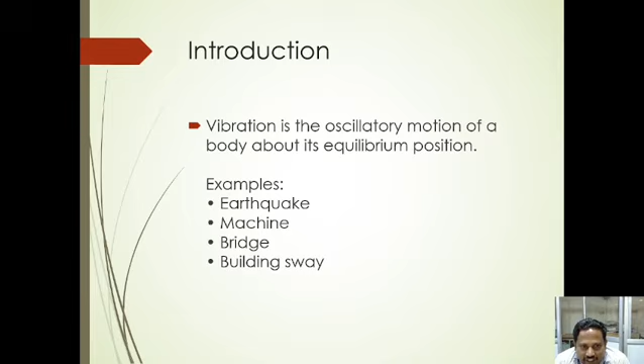Today we see the topic about vibration, the subject of occupational health and hygiene. What is vibration? Vibration is nothing but oscillation motion of a body in equilibrium position. Example: earthquake, machine and bridge and building sway. Basic terminologies: displacement, velocity, acceleration, amplitude, time period, frequency, natural frequency, damping.

What do you mean by amplitude? Maximum displacement is called amplitude. What do you mean by frequency? Number of vibrations made in a second is called frequency. What is time period? Time taken to complete the vibration is called time period.

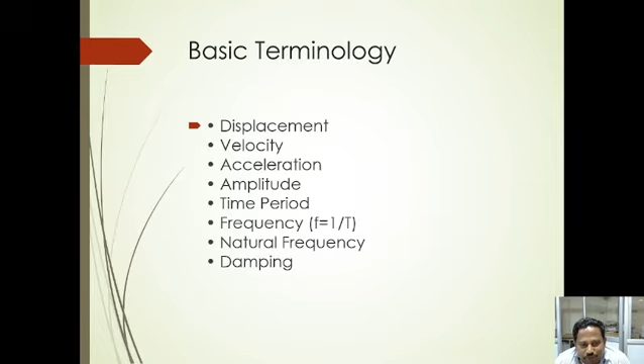What is natural frequency? Vibration made naturally is called natural frequency. What do you mean by damping? Damping is a process to avoid the frequency or protect the frequency.

What are the types of vibration? Free vibration and forced vibration. The vibration made with free energy is called free vibration. The vibration made by external energy is called forced vibration.

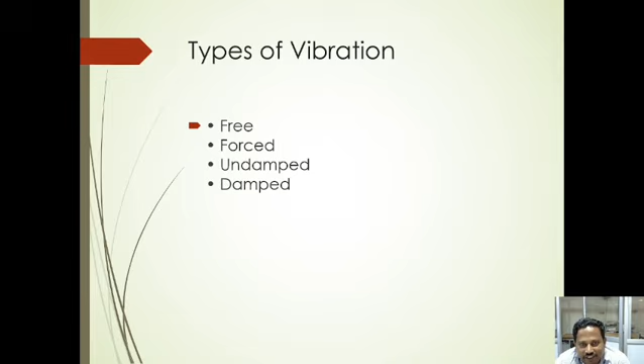What do you mean by undamped? Vibration made without energy loss. What do you mean by damped? Vibration made with energy loss.

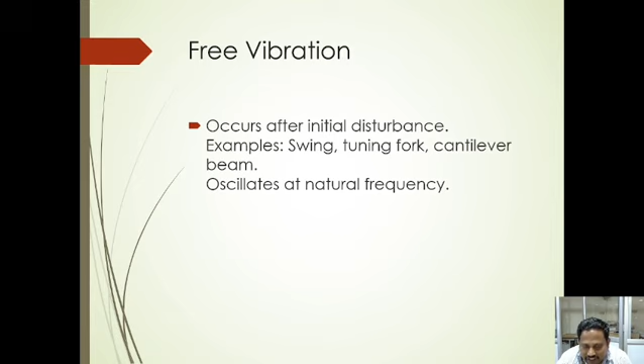What is free vibration? Free vibration is nothing but the vibration that occurs with its own oscillation, called natural vibration. Forced vibration means the vibration made by external frequency is called forced vibration.

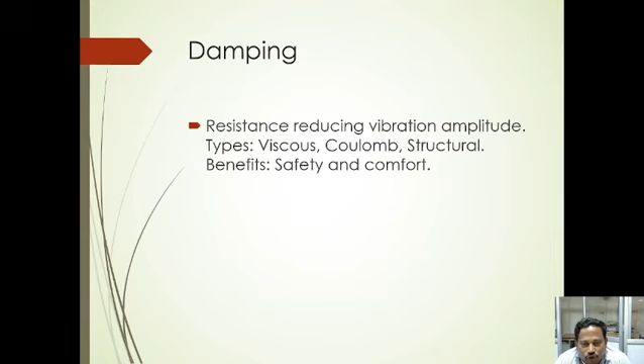What does damping mean? Nothing but to prevent or reduce the vibration. This type of term is used for earthquake resistant structures, using a rubber roller at the base of the structures. What is resonance? Resonance means external energy is equal to the

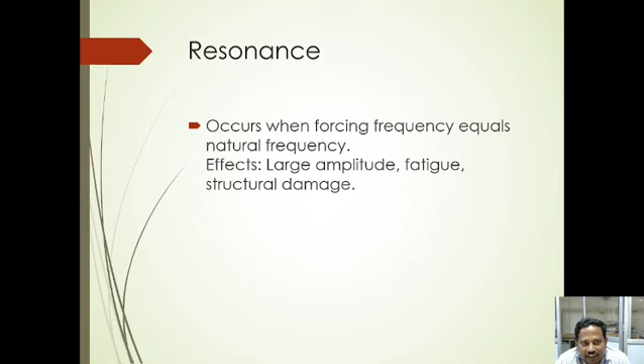Natural frequency which is equal to the external force is called resonance. The sources are called earthquake, wind force, rotating machine - these are sources of vibration.

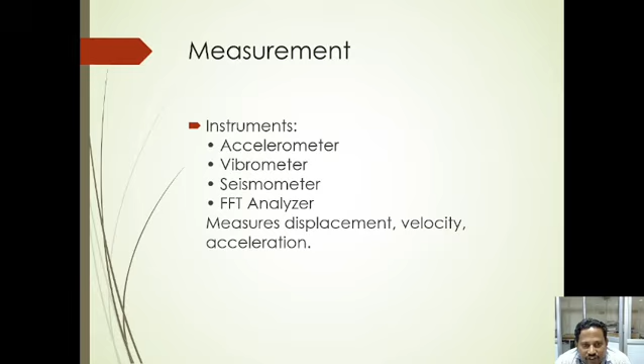The measurement of vibration is done by accelerometer, vibrometer, seismometer, etc. The applications are in earthquake resistant design, bridge dynamics, building monitoring and machine foundation.

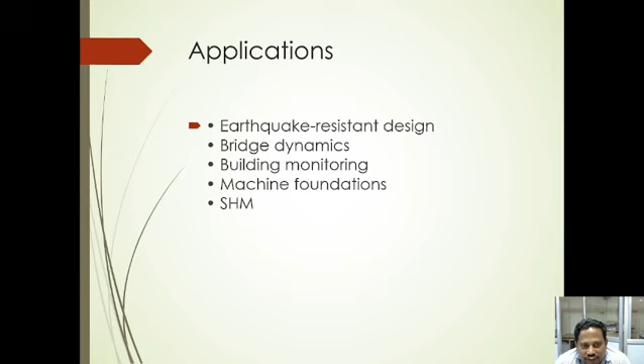Methods of controlling vibration: base isolation, mass damper, viscous damper, rubber damper, stiffening damper. Thank you.